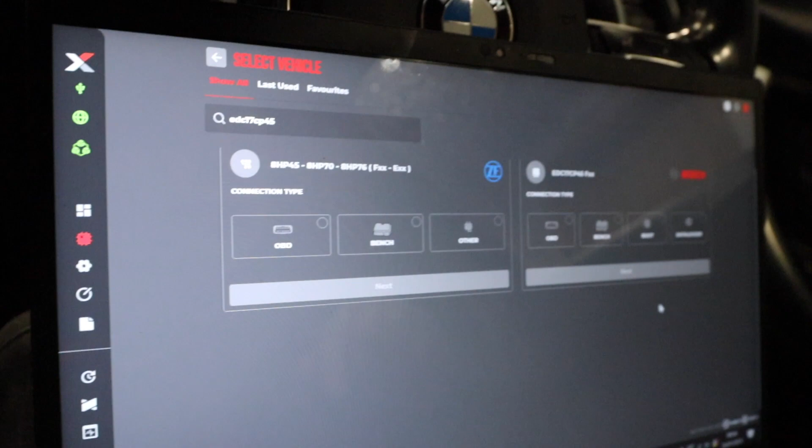So I'm going to use flex, which is slightly different in terms of software. It's kind of new looking, but still a bit hard to get around, but we can use it, it's fine. So I'm going to use the whole flex system today, so I'm going to try and set it up, do OBD read and write. I'm going to use their data logger, which I've not used yet, so I can have a look into that. And I'm also going to use their map packs to see if they give us enough to actually tune the car. That's all today, so let's get into this one.

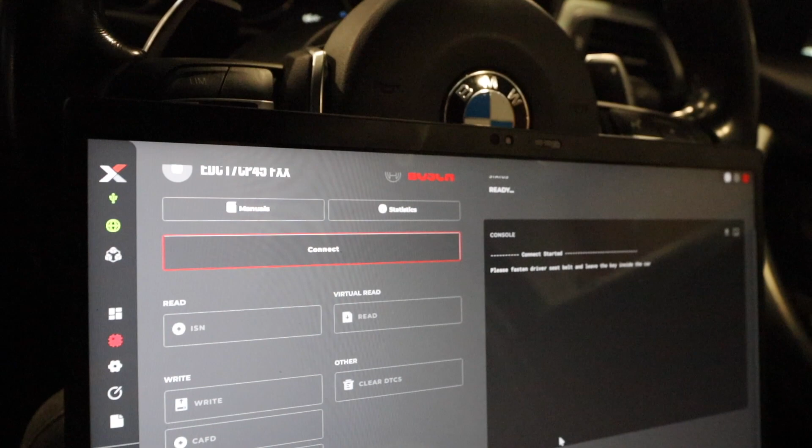See if this connects, it's all connected. CAFD, do you want to save it? Yes, it's always a handy, helpful thing, especially if you use E-Sys. So that's all that done.

I can read the ISN or I can do a virtual read. I'm obviously going to do a virtual read, so that'll give me the file. Do I want the file? Yes, save. There's the file. So that's the first stage done, that's giving me the read of the ECU.

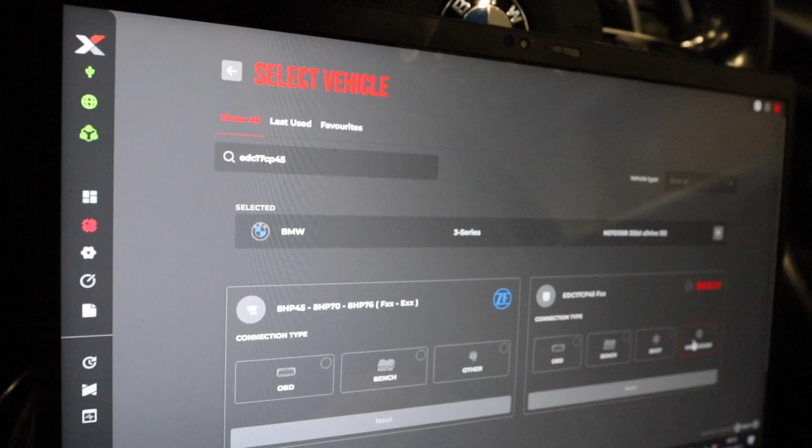So now I'm going to have to keep changing cables, which isn't ideal. So let me just swap the cables over to the red one and come back. Right then, so we're on the red cable, let's carry on. Next stage, connect.

So this is now giving me everything in German. Ambient pressure, pre-throttle pressure, mass airflow. Okay, this is looking quite crap.

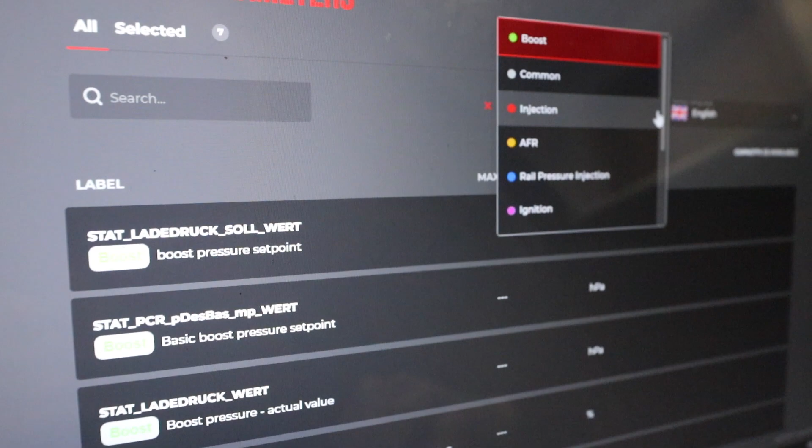Right, let me just set this up then, and then we'll come back. Okay, so I just figured one thing out. They've got like a little drop down at the top, so you can filter by group, which they're saying you need like boost, common, injection, AFR, rail pressure, ignition, torque, temperature, boost actuators, mass airflow. So I'm going to go through those now and click what I need.

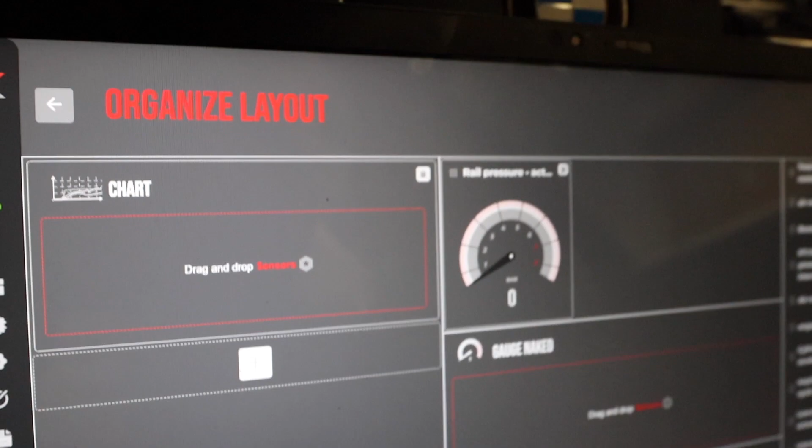That's a lot handier than just having it how I thought it was going to be. So let me just go through those and pick what I need and then come back. Okay, once you've done all that, now I've got another part where you can select sensors you want and make them into gauges or into a chart, which is pretty cool. So that's the next one for me to do.

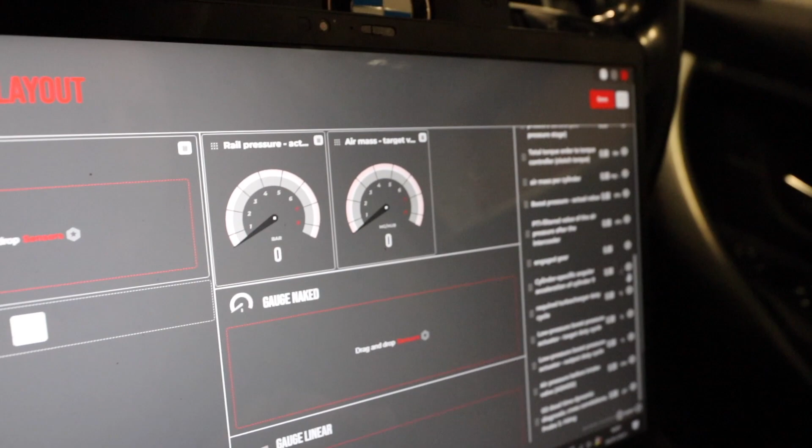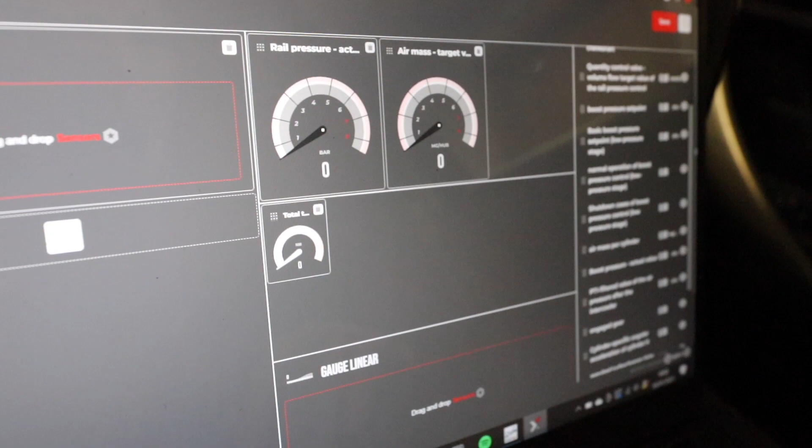So air mass target, so you can have gauges. What else we got? O2, what do I need to see all the time? Clutch torque, I'll have that, so I've got to do the gearbox too. Normal operation of pressure, low pressure stage, engine speed at the crankshaft, so we want that, battery voltage, ambient pressure.

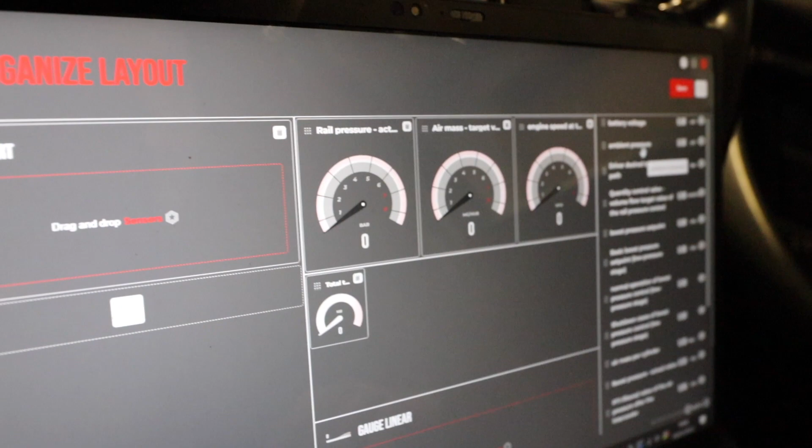I need some more bits on here yet, some bits that I don't have. I want injection time, injection and all sorts.

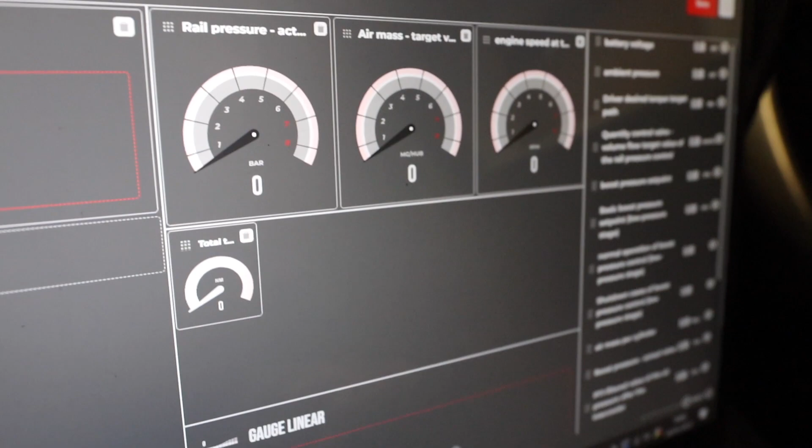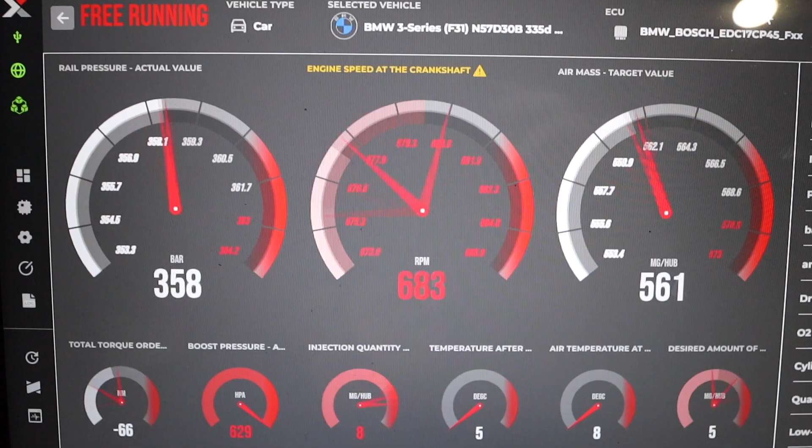I was going to go back, get more than I've got there. Right then, so once you're set up, you get all the gauges laid out like that. I'm guessing you can change those after because they're a bit iffy at the minute. You can record logging space, all that kind of stuff, and you've got everything logging on the right hand side too. That actually looks pretty cool.

So I'm going to do a run now, set the dyno up, get us going, and see what this log looks like when I'm finished. Right, so that's the dyno set up, we're all good to go.

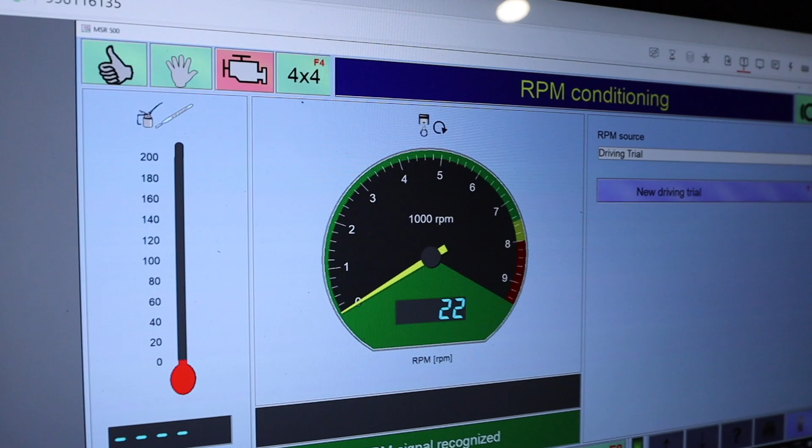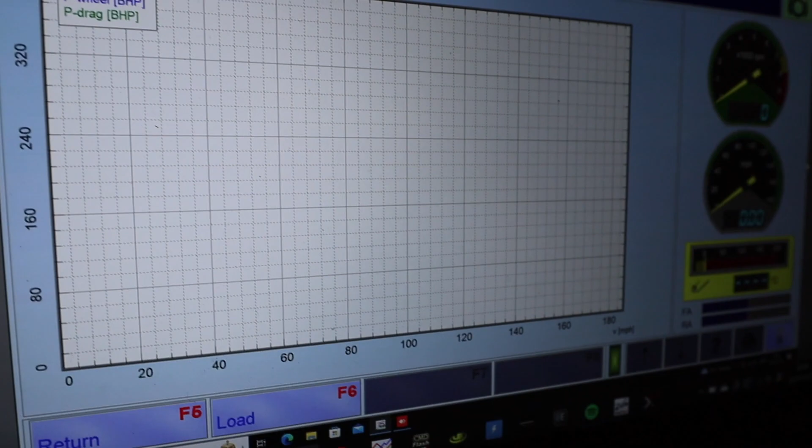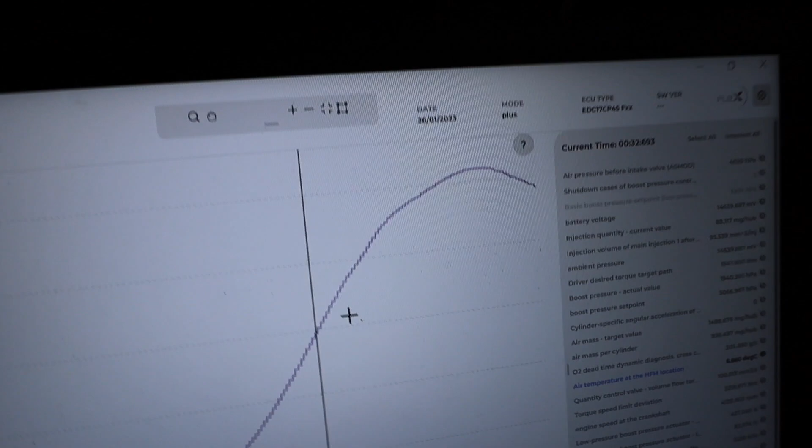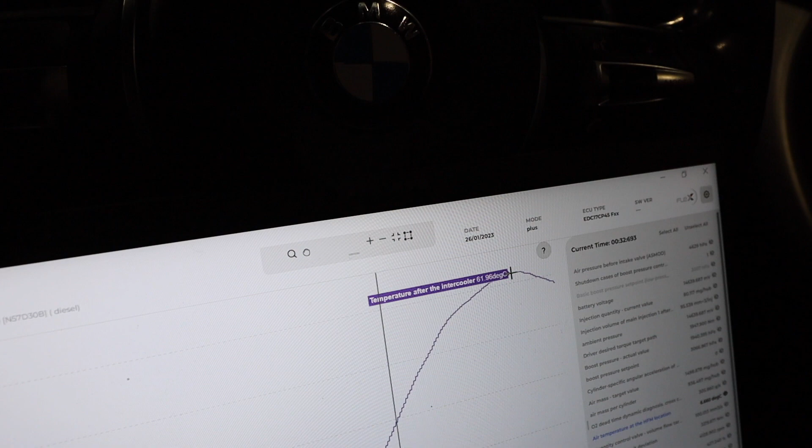So that's all done, and as I thought, the actual air intake temp going into the MAF is 7 degrees, but we're seeing around 61 degrees at the cooler. So for a 7-degree day, we're now up to 61 degrees. So the answer is probably yes, you do need an intercooler.

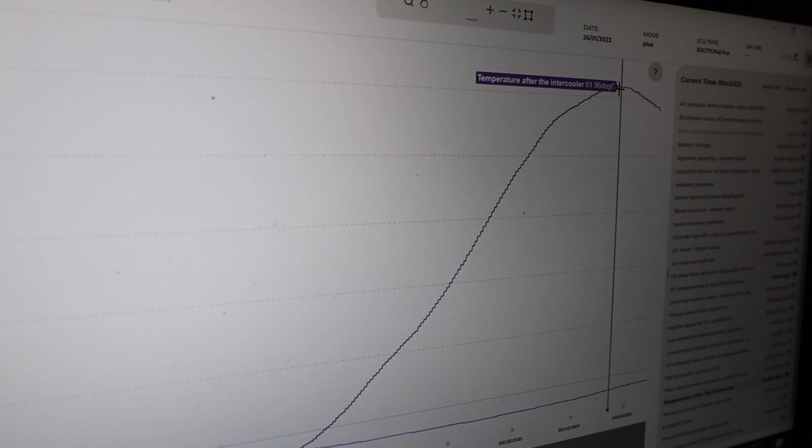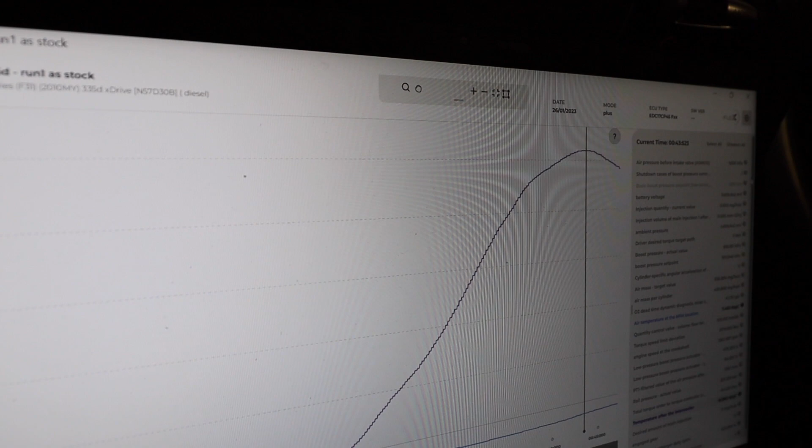But now it's just about finding the right intercooler to work with this setup, because obviously that's quite a ramp for the actual pressure we're running at. It's a bit confusing on here, I don't quite like it that much. You have to faff about a little bit.

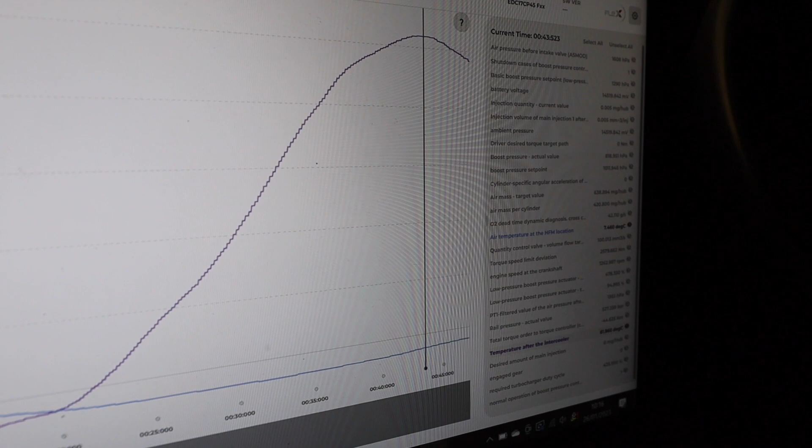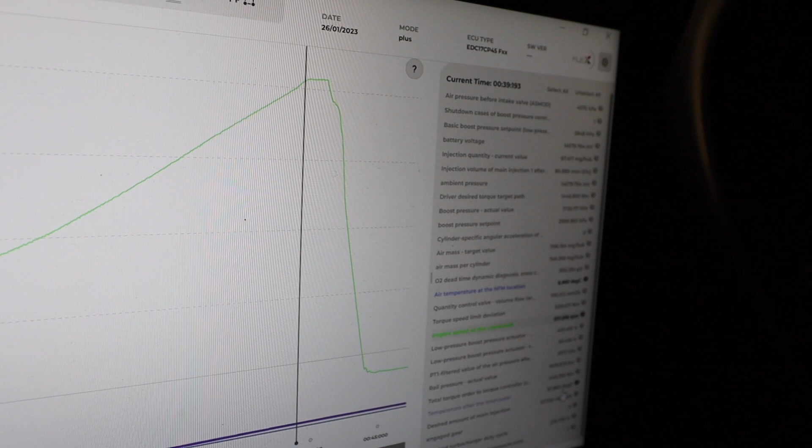Engine speed at the crankshaft, that's what I want. So at peak RPM we're running 57.8 degrees, and 6 degrees into the intake, so that's a good sure sign that the system isn't very efficient, and it is raising the temperatures quite badly.

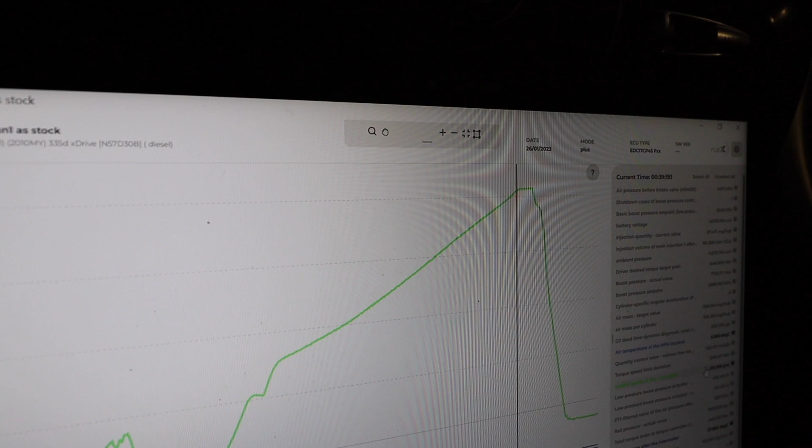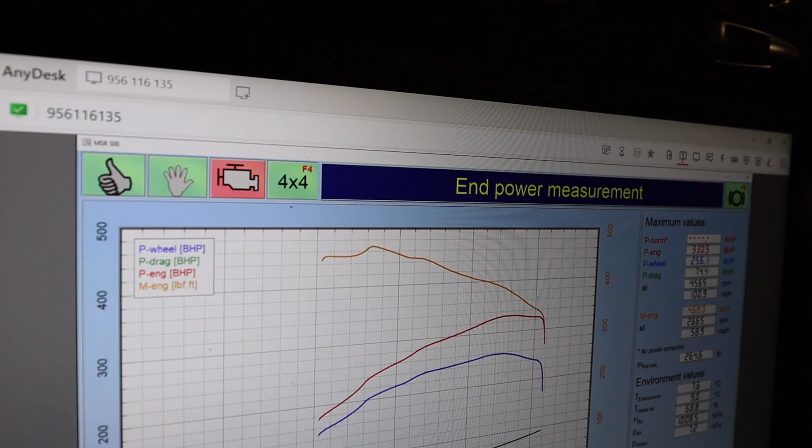So we're currently at 330, I think, looks like. Let's have a look. Where are you? There we go. So just switch that to DIN. So on a freezing cold day, we're getting 325 HP on the DIN, 460 foot-pound.

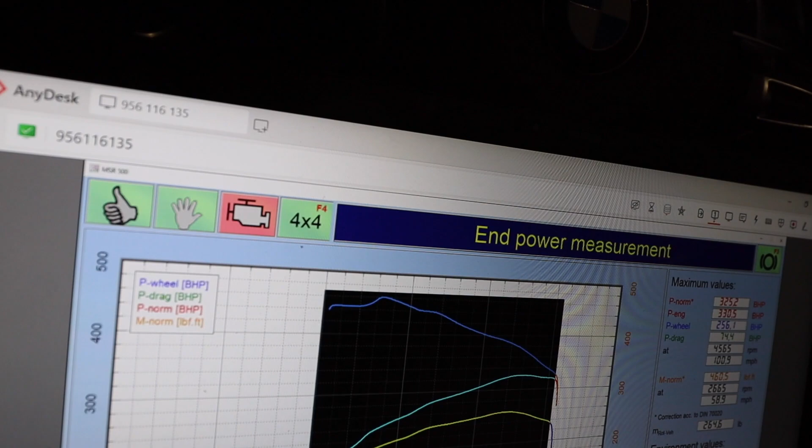So not bad. So what I'm going to do now is make some changes. I've already read the ECU, we've got all that. Let's open that, I've done this quite a few times.

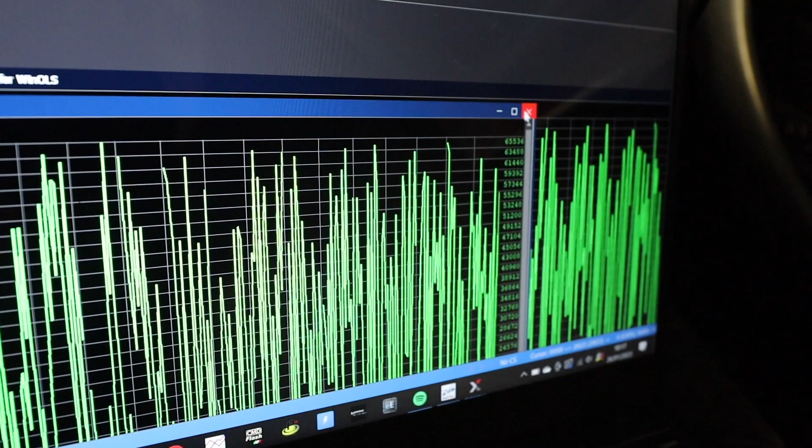So BMW Bosch, load that into WinOLS. I'm going to see how good their map pack is to be able to tune this car using their system. Just delete these off, files I've already done. So BMW Bosch, drag that in there.

I've tuned this car quite a few times - well, not this car especially, but cars like it. So I'm just going to ignore that, sorry. I'm going to open up the file. I'm going to show you the magic system for this.

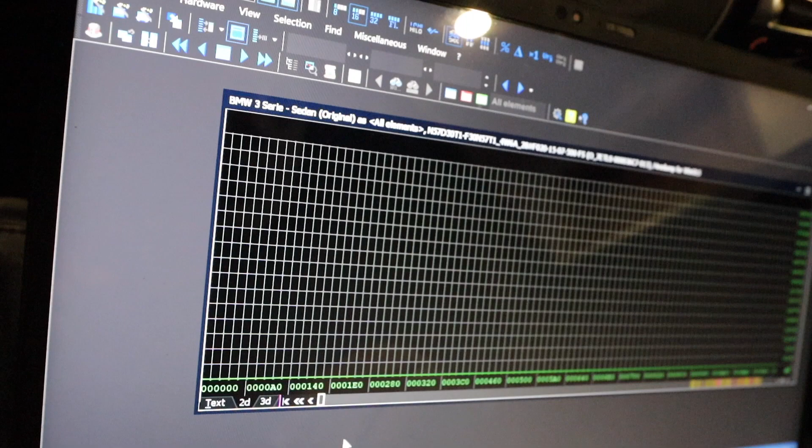So this is the file, that's what it looks like. Not very exciting in a minute. So I'm just going to use their system to see what their map pack's like, to see if we can use it to tune the car.

So it's going to upload that file to their system and see if they've got a map pack for it. They have. So to download that - it's got 212 maps in it apparently. So let's see what we've got. Just wait for it to load.

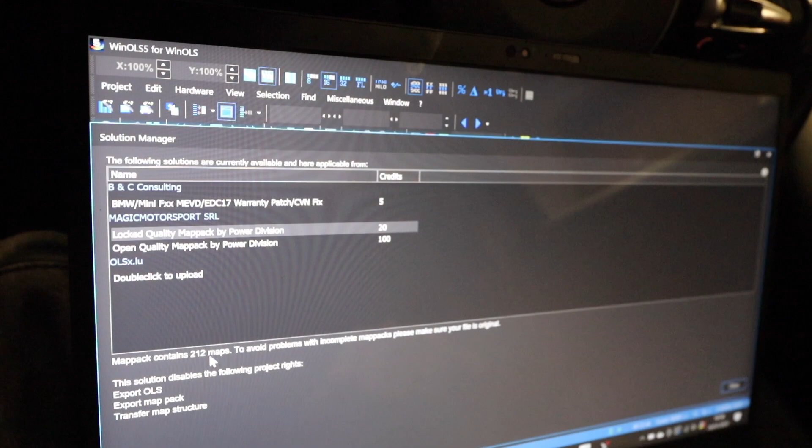You do need to be using WinOLS 5 for this option, and I think it's 20 credits, works out to about 20 euros. So see what we've got. Close all folders. So we've got air control maps, engine torque limiters, engine torque request maps, exhaust gas temperature maps, gearbox torque limiter maps, idle speed, injection rail, smoke, sport display calibration, torque monitoring, turbo boost pressure.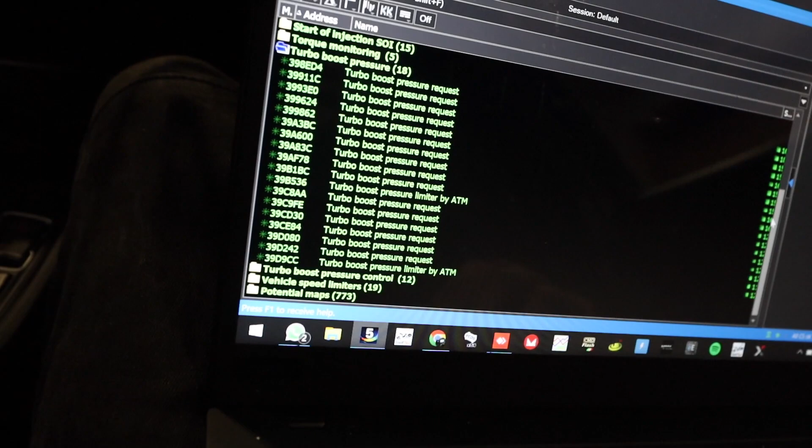Now the thing with the turbo boost pressure, if it's anything like their other packs, it doesn't really tell you what's a low turbo and what's a high turbo, so it's not that great for that. So if they are watching, change your map packs so we know what's going on. Then we've got turbo boost pressure control, vehicle speed limiters, and obviously the potential maps is what WinOLS has found already, but they're not actual maps. They're just kind of - it knows the Bosch layout and what a map should look like. It doesn't tell you what the maps are though.

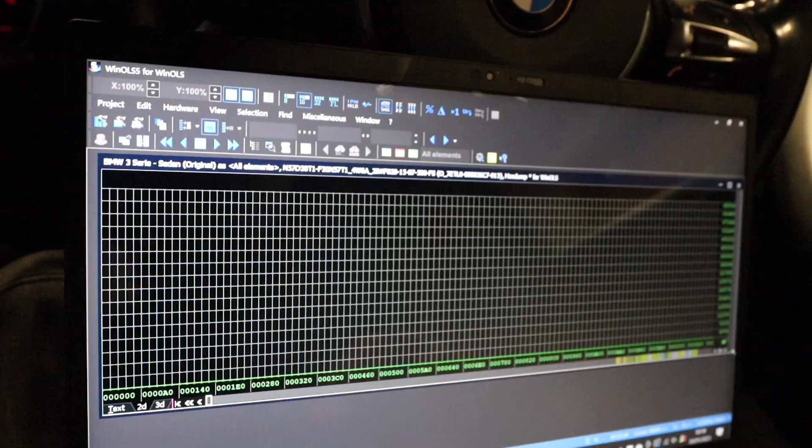So far so good. What I'm going to do now is just make a quick stage 1 for it, or load in my stage 1, and then see if there's any maps missing between what I would normally choose and their system. I need two hands for this, and then I'll come back to you.

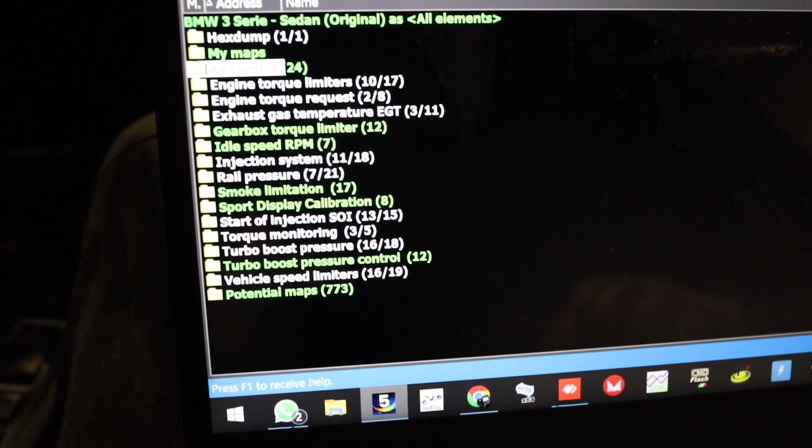Right then, with my tune loaded in, all these white folders are the folders which I've got actual changes in compared to their map pack. So air control I don't need, engine torque limiters, engine torque requests, exhaust EGT limits, injection system, rail pressure, start of injection, torque monitoring, turbo boost pressure, and vehicle speed limits. I've got all changes in there.

Obviously there's only 16 out of 18 maps changed, 3 out of 5, 13 out of 15. So I wouldn't say it's comprehensive, but it's pretty decent for you just to be able to jump in and tune what you need to do, which is what most people kind of need. So that's my stage 1 kind of loaded.

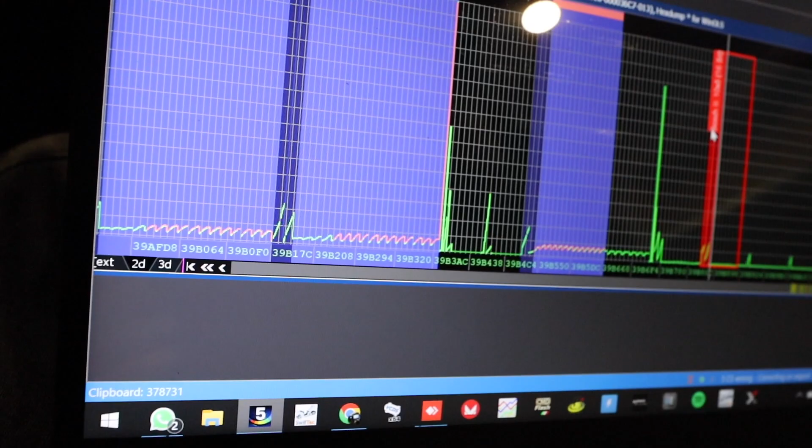So I'm going to send this to the car using Flex, and then move on to the next stage. I'm just going to use Flex to actually flash this car now. So write the tune, okay, upload. That's stage 1 I just built.

I did the gauges too. They're in the tune, like little offsets inside the tune which we can change to change the gauges on here, so I'm just going to write to that too. I've plugged in the driver's seat belt because that keeps all this alive whilst you're flashing, which is obviously something we need. So I'm just going to flash this ECU, and then I'm going to come back once it's all done and see how we get on.

Right, so this is still flashing. I'm using Flex to tune this car. So this is how we tune cars, right? You get a lot of stuff on the market where it's saying, I want a live tune, I want this tune, I want that tune. Majority of these ECUs we can't live tune because we can't get on it, the protocols aren't there. A lot of the VW stuff we can, but it doesn't really make much difference, especially at this level of a stage 1.

So kind of any tuner can do this. You don't have to be on the dyno, it can be anywhere. It's basically a continual session of reading the car, logging the car, making the adjustments in the file and the tune, flashing that back to the car, driving the car again, making sure the car's liking the changes and performing as it should, and then you just make adjustments from there to the point where either you think the car's where it should be, or maybe the customer wants it in a certain way. That's tuning. That's what we do.

So I'm just going to run this car now, because that is all flashed and ready to go, and then we'll move on to the next one, a Golf R this afternoon. But I'm hoping I can make a few more changes on this one yet, see what's going on with it, and obviously I've got to do the gearbox too.

Right, one thing I've now just come across which I don't like, because we basically sell time. So if you make things long for us, then it's not really much good.

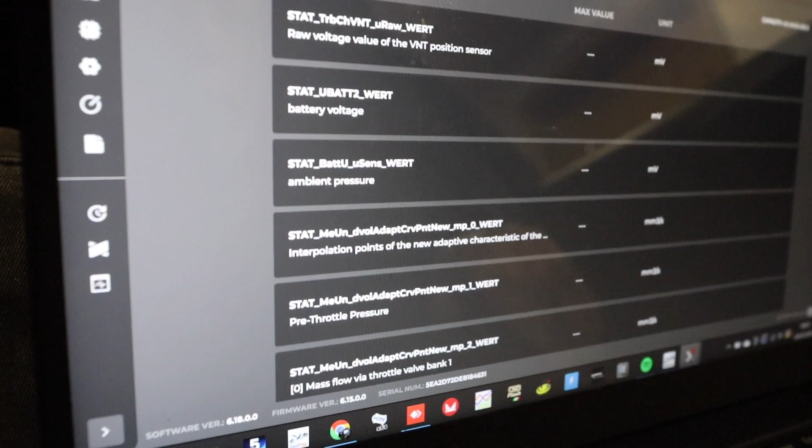I've got no way of saving or loading a save data log, so I don't have to keep selecting all these all the time, which could get annoying if you forgot to tag something from the previous run and haven't got it on this log. You can't look at the difference between the two, and you've got to go into it and run it again, so that's not great. Obviously people like B-Flash give us what we need and then we can add to it, but it's the same every time, or we can export, save, and whatever else. So that's one update I'm hoping we're going to see, because that's going to get annoying.

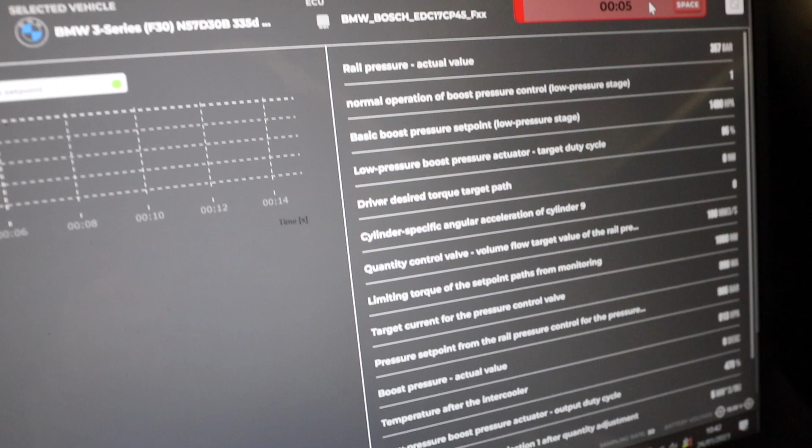Right, so here we go. I'm not even going to bother with the gauges this time, I'm just going to run it and look after. I've got the boost, I can see everything else I need on here, so I'm just going to run it and see where we are.

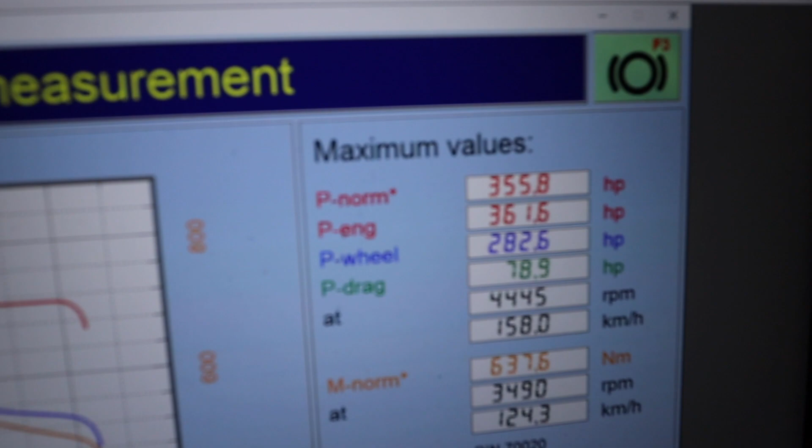So sorry about that, I've had a few other jobs to do, but we're currently at 355 brake at 637 Newton meters. So the torque's about right, but I need to do a bit more work on that HP to get that up there. So my next bit now is to look at the logs, see what I'm down on, missing and whatever else, and then start going through it.

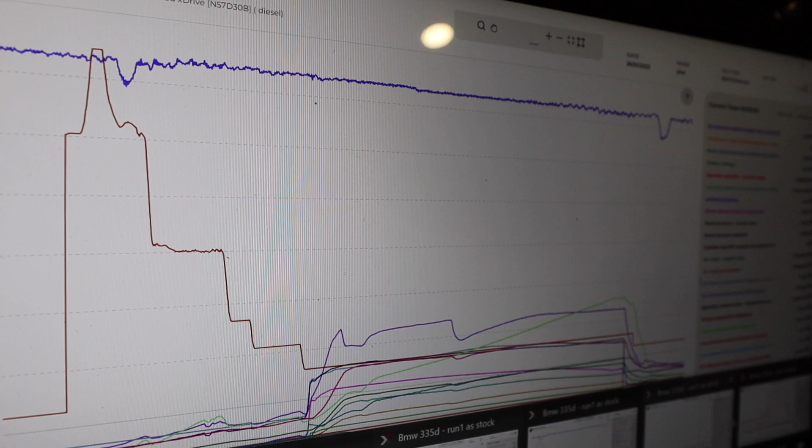So with this log, I'm just going to go through it, make some adjustments, send it on again, and then come back.

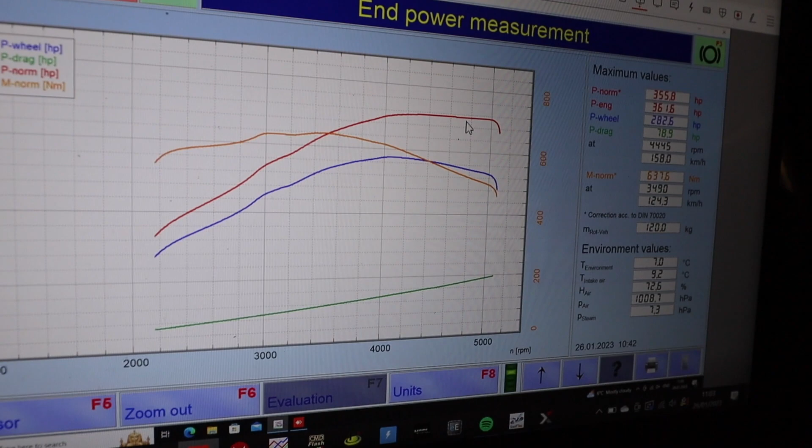So I've gone through the tune, and there's not really loads to change, to be fair. What I am currently looking at is the current graph is quite decent and flat down from there onwards, so I'm not really pushed where I'm actually tapering the power off in the map. So I've made a few adjustments just to see if I can get that to hold on a little bit more and make a little bit more power out of it without using any more fuel. There are different tables in these you can mess around with to the point where you're not really going to change the dynamics of the MPG, but you can still make more power.

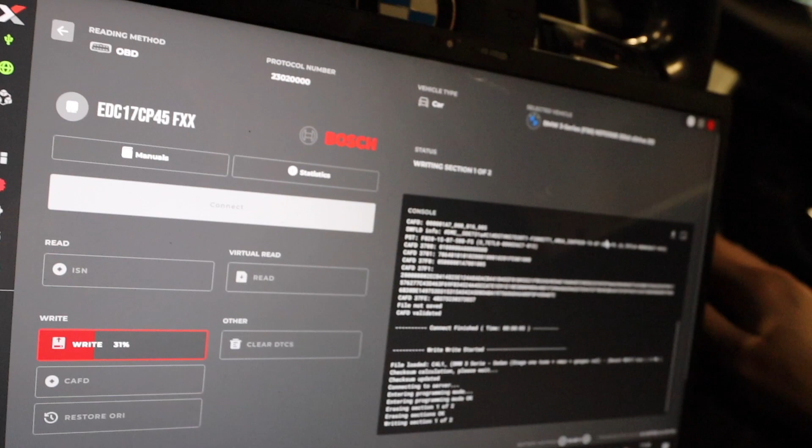So just a little test, see if I can do it. If not, that's okay, still a quick car, but I'd like to make some more if possible. So let's just wait and see.

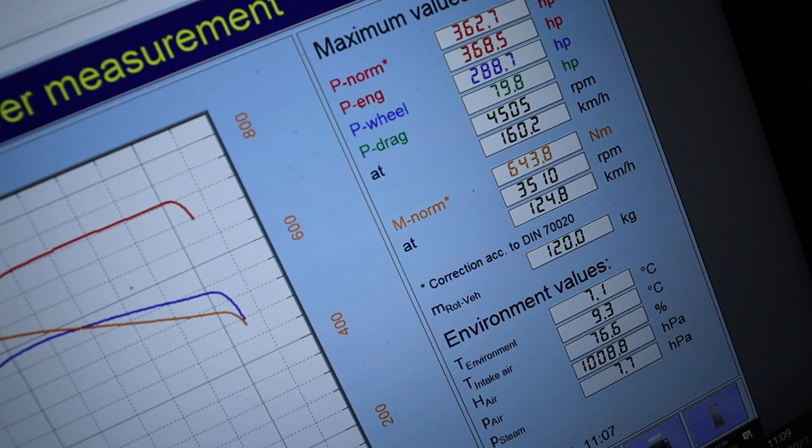So results are in. Yep, we're at 362.7 at 643.8 Newton meters without me doing the box yet. Pretty decent, we always quote anywhere between 360 to 380 brake depending on the car, so I'm happy with that. I'm not adding any more fuel, so we've got no smoke or anything like that. Looking pretty decent, so let's just get onto the box, sort that out, and then pretty much done.

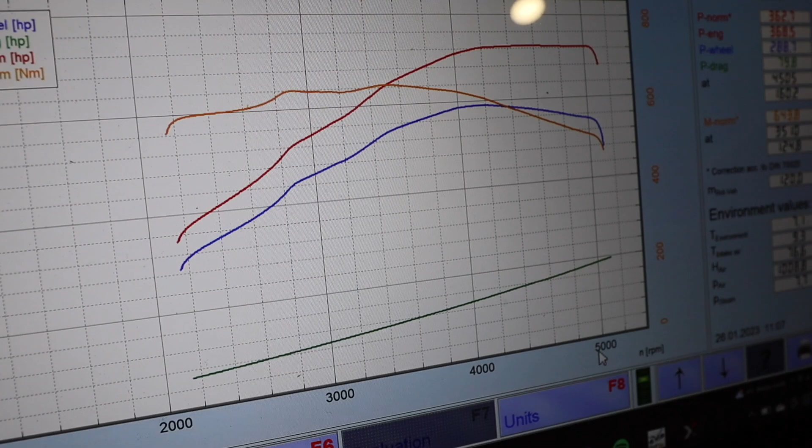So with these we also have a virtual read or an actual read, which is handy. Get that in focus - obviously we can write the CAFD as well. The CAFD needs the coding, so that's pretty cool, it saves the coding when we read so we can always flash that too. But that's all read now, so I'm going to go load that into WinOLS and export the tune, and off you go. So that's just now flashing.

So gearbox tunes are a lot easier in the fact that you kind of get them right once, and that's pretty much good to go for the majority of boxes. So you do everything people want - internal torque, raise, shift speeds, manual locks, gear displays, all that kind of stuff - and once you've done all that, that becomes like the tune, if you like. So very rarely do you have to do much with the gearboxes once you've set one up, which is a lot easier when it comes to tuning. Sometimes you just flash the gearbox while you're tuning the engine, so that's pretty much done. Once this is flashed, that's the gearbox done, and that's it really.

Session complete, next car. So that is day complete on that 335d. I did a Golf R2, but I'll move that into another video because the video kind of goes on quite long. I've also got this lovely Porsche strapped down for me first thing tomorrow, so I'll do a bit of coverage on that. This one's running StageX hybrid turbos and all sorts of stuff, so I need to get more into the day-to-day stuff with you now that I've covered the tools and things like that.